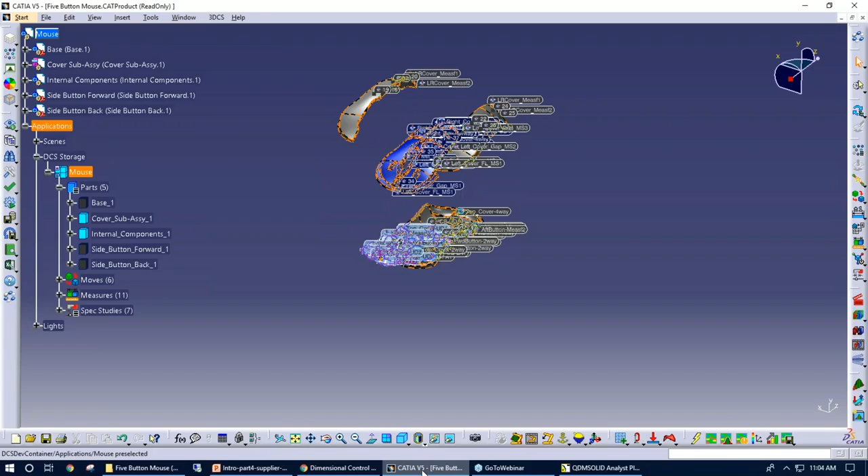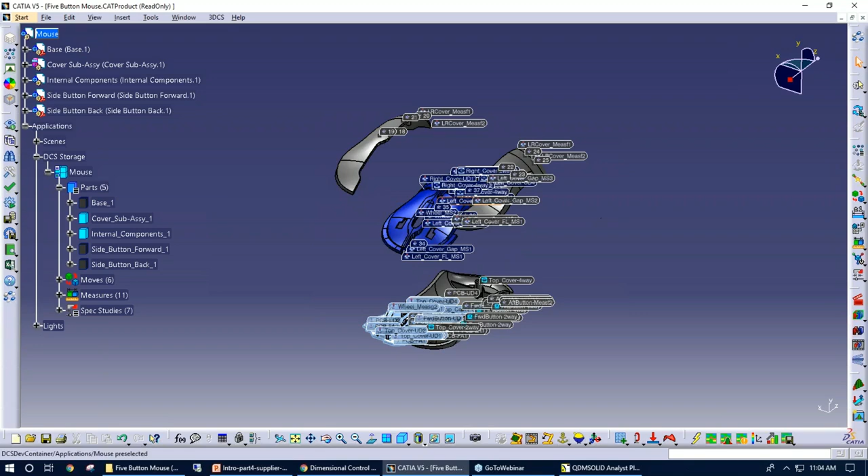Going to jump into a CATIA model that I actually have for demonstration purposes. Let me turn this off. So what we have here is a computer mouse, just a couple part assembly. What I'm going to walk you through here is, if you're not familiar with 3DCS, the actual tool itself, we use the CAD data and we create points and use the features within the CAD to build up the tolerance analysis model. So the points here, all these labels, I'm just going to turn those off for right now just for clarity.

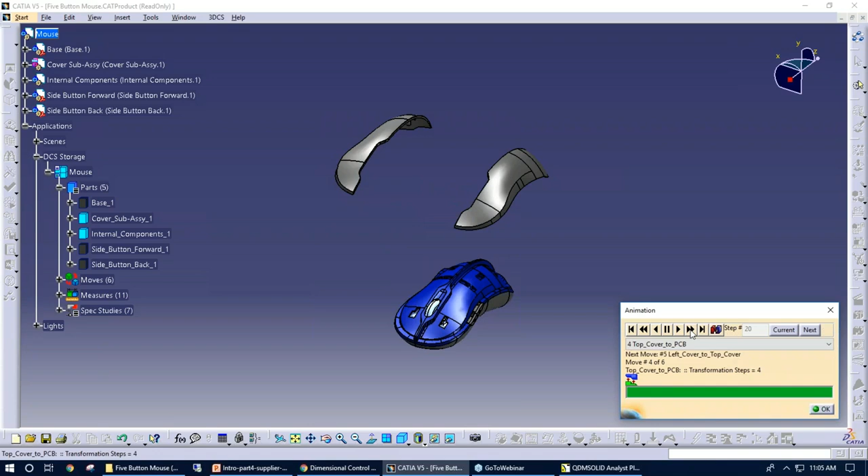What we do is we take the assembly process here. So I'm just going to go through and build this particular assembly. So it's building according to how it's built on the shop floor. What this is doing is the reproduction of the build is going to create results that are as accurate as possible. I'm going to build the last couple covers here, a couple moves here. So we have our moves. I'm going to zoom in on this a little bit here.

So with the points, these points and these different features, they all have tolerances applied. I'm going to hit deviate. I can go a little slower, a little faster here. I'll keep with this speed. So what the system's doing is Monte Carlo simulations. We're seeing the different gaps here between the cover, even the wheel here is moving around. This is simulating the different builds in a visual format.

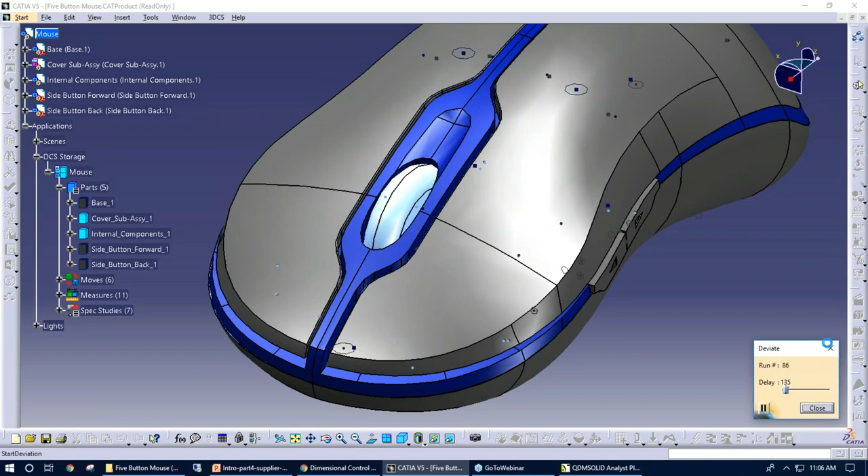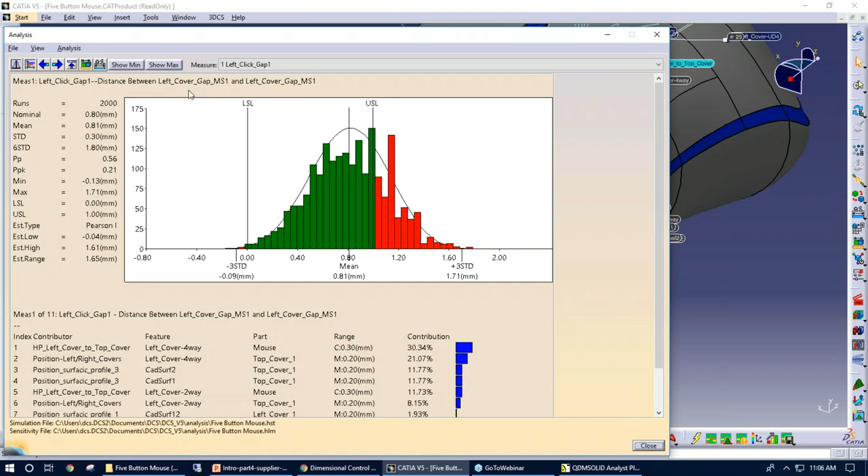So looking at just some of these gaps, we're going to run a statistical output. In this case, I will just do 2,000 runs using the Monte Carlo simulation. I'll just overwrite some old results I have here. So what I have right here is the distance between my left cover. So this front gap, let me just slide a couple of these out of the way so we have some clarity. So we're talking about the gap here at the front. As we can see, we do have a little bit of red according to the spec limits.

What we can do within 3DCS is we can move our limits around just to get an idea. I'll leave that one at 0, but my upper spec limit here, tolerance, it was 1. For example, I can move it to 1.5, get an idea of a new PPK. I can also put in a PPK target and have the software identify the spec limits that would be needed to meet that criteria.

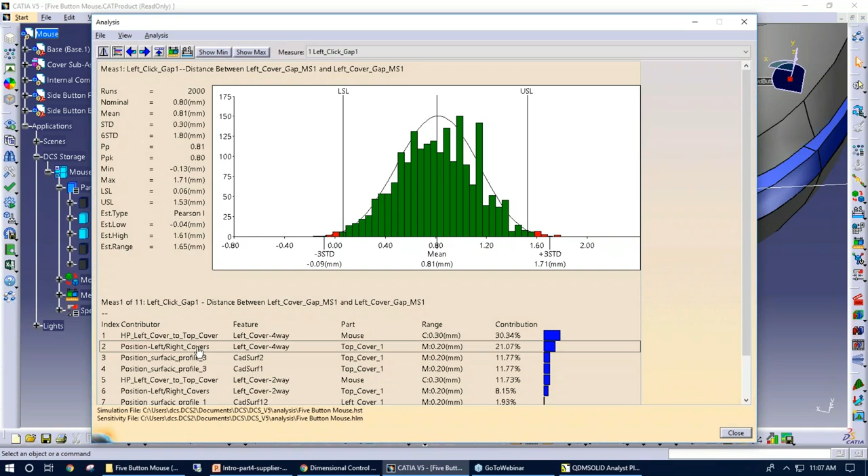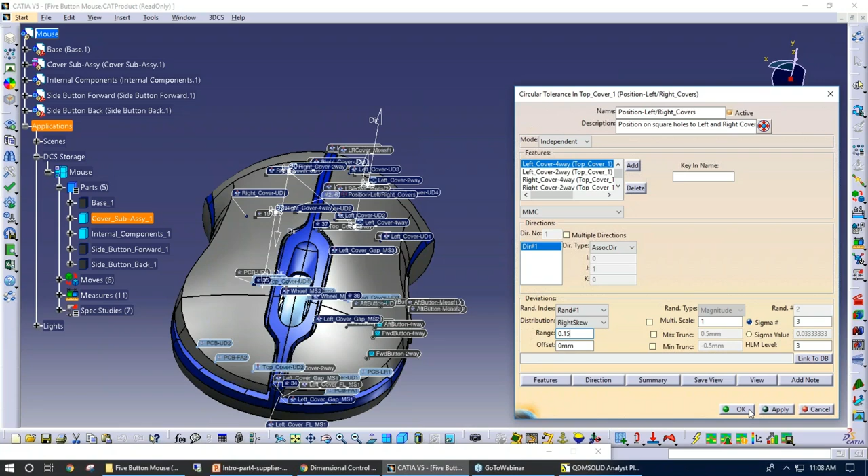So the bottom portion of this, these are the contributors to that particular measure. So when we say tolerance negotiation within 3DCS, we can do a little bit with the spec limits in regards to moving those around to obtain a new PPK. We can also take one of these contributors. I'll just pick on the second one here. So when I double click on this contributor, move this out of the way here a little bit, the system highlights those features, and with a 0.2 range, I can quickly change this tolerance, and I could rerun the simulation to produce new results. So there's a little bit of what-if scenario being done there.

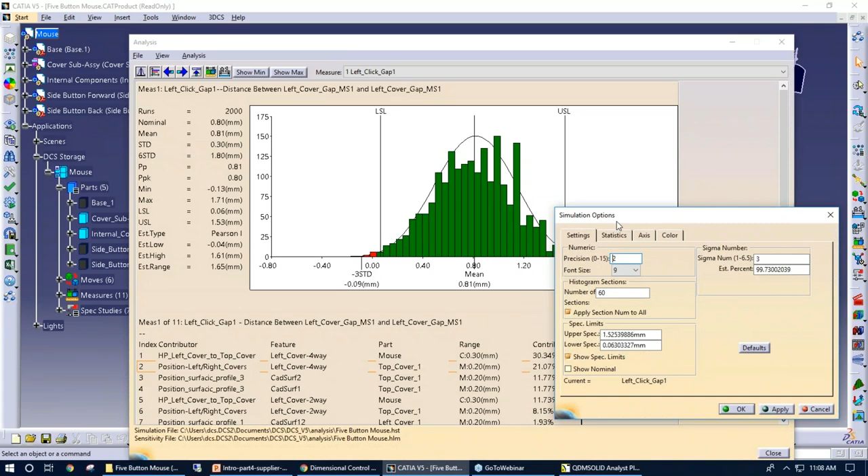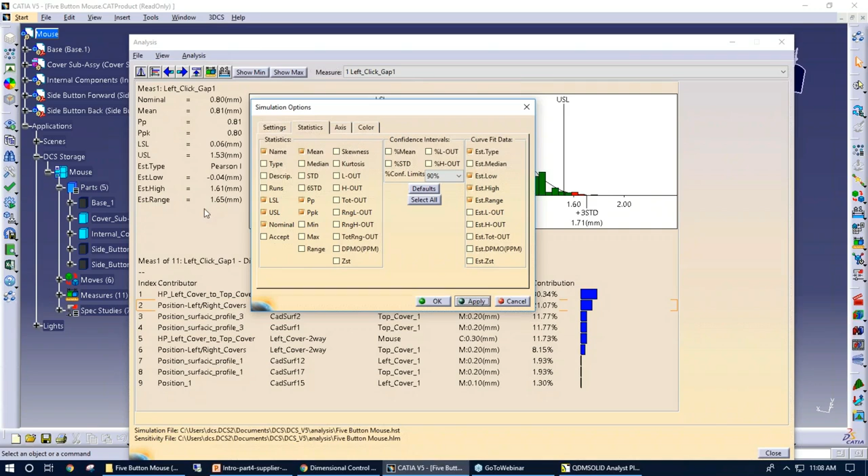Can you show very quickly on your analysis output how to activate the additional PPK options? Yes. So in regards to statistical options, I can show you the options we have here. Simulation. So for our simulation options, these are all the options you see here at the top. I have PPK on. Some of these other statistics I can turn on and off based off your needs. I can make this as simplified as just showing a few of these. I'll leave that on. Nominal I'll leave on. So I don't have to run the analysis again. Now I've simplified it for maybe some statistics that are more desired than others.

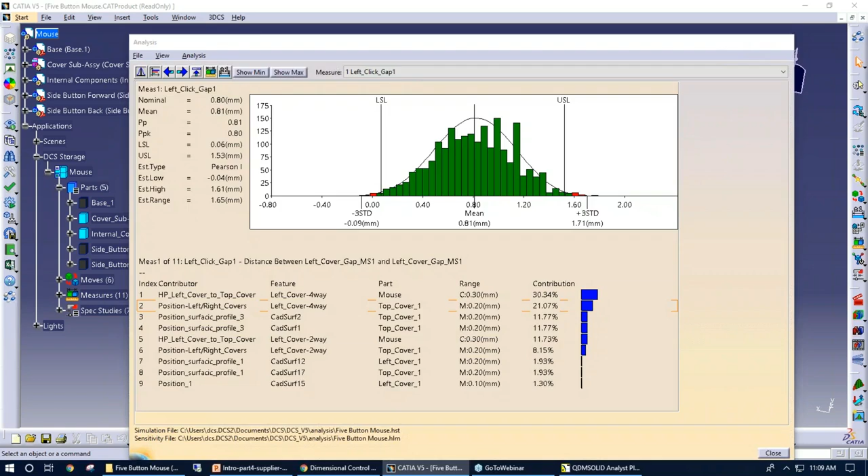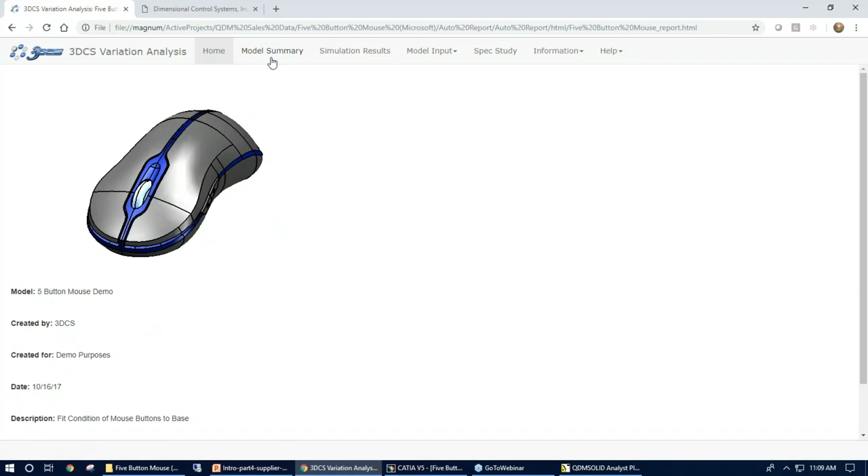So once the analysis is done here, we also have the different reporting options. What I can do here is I can pull up our HTML report that we've created for this particular model. So right here with the HTML format, it goes by the different tabs at the top. Our home page, just a little bit of basic information. Model summary, this is where you can put whatever type of information is desired in here. We do have this template of how some customers have it set up with an objective summary, critical measurements, observations, considerations, revisions, assumptions, and there's more things that you can add. So this is totally customizable to your needs.

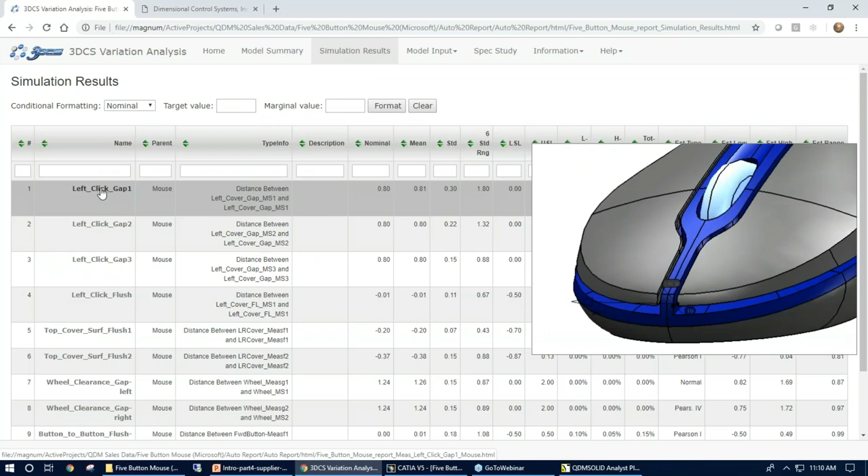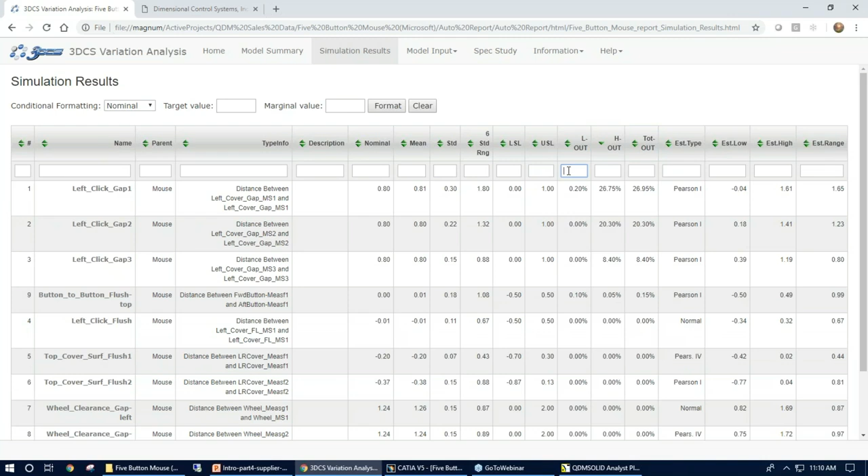Simulation results. Here's a statistical output. If you hover over any of the actual results, it gives a quick little image of what the measurement is, provides the particular statistics in a table format that's all sortable by one click, or we can type in filters within this box if you desire. If I click on one of these, I can get a little bit more information. We have our bell curve here with the statistics. I also have a sensitivity tab. It also shows the contributors, highlights them within the picture given, and identifies the range and contribution percentage.

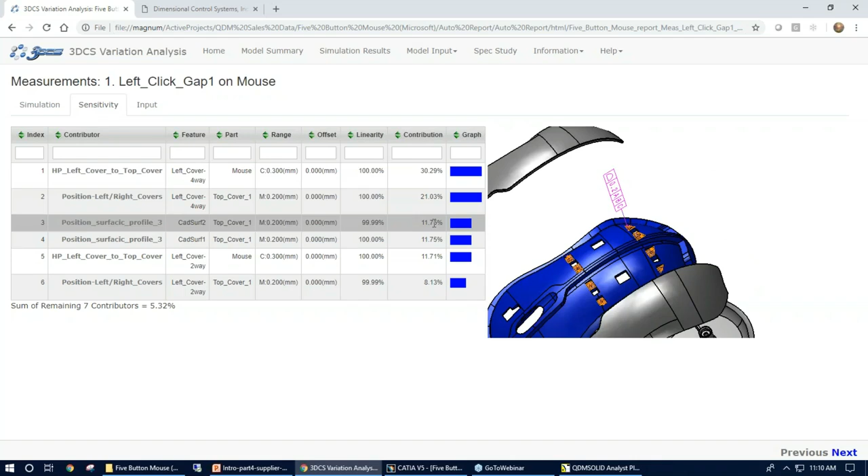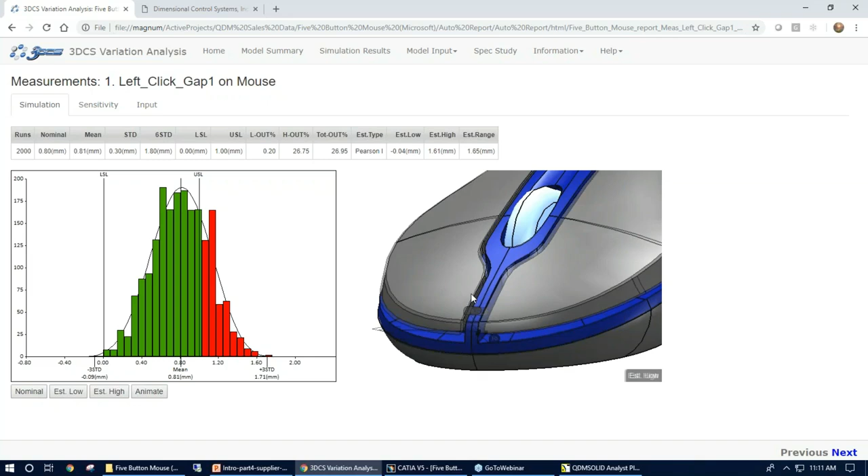One other feature here is under the simulation tab, we have animate. So when I hit this here real quickly, you can see the different images. What this is doing is showing the lowest possible gap within an image, and the largest possible gap within the image, also with the nominal gap image in there. So we have a little text box here in the corner showing what each one is.